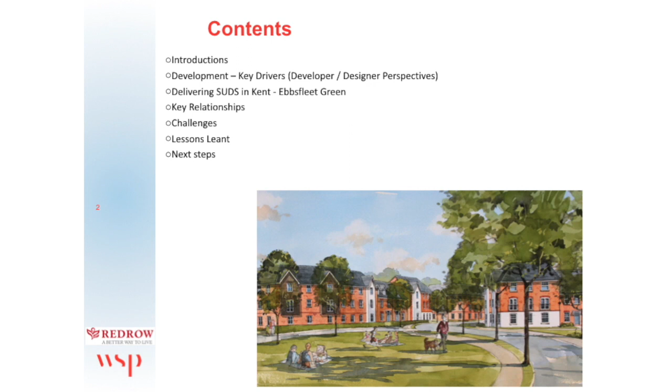We'll talk about some development key drivers, things that developers would try to look for in a development from a developer's perspective. I would also touch on some of the things I would look for from a designer's perspective. We'll talk about general delivery of SuDS in Kent with particular emphasis on the Ebbsfleet Green development. We'll touch on key relationships and challenges faced in delivering these SuDS and some of the lessons learned in delivering Ebbsfleet Green in particular, and how we can take that into the next steps into other developments. So without further ado, I'll just ask Glenn to introduce himself.

Hi, I'm Glenn Holliday. I'm currently engineering manager for Redrow Homes. I previously worked for highway adoption authorities at Kent, and I've also been a designer. My name is Dan Samaila. As a bit of a background, I have a civil engineering background as well, a chartered engineer. Bit of project management and highway design experience. Done a lot of work with trying to promote sustainable drainage, following the footsteps of some of my peers, some of them in the room as well. Trying to just do the best you can do from a designer's perspective.

One of the things I did get involved with, CIRIA especially, was being a project steering group member of the structural design and geotechnical design of modular geocellular drainage tank systems. So yes, trying to do as best as I can to improve ourselves, be able to put into developments as we go into design stages.

So, from a development point of view, obviously I'm a developer, boo, but we're here to build developments and sell houses. But there's a bigger purpose we understand that goes in and around our developments. So, a few of the key drivers that we have from a developer's point of view are: we want to build high quality homes, create places where people really want to live, build sustainable, vibrant communities, and more recently at Redrow, net gain on biodiversity. That's something that our group is driving, and it's a work in progress, but will be coming out over our developments. Obviously, when we talk about SuDS, there's an underlying, sometimes more important issue, the water management, which is where Dan comes in.

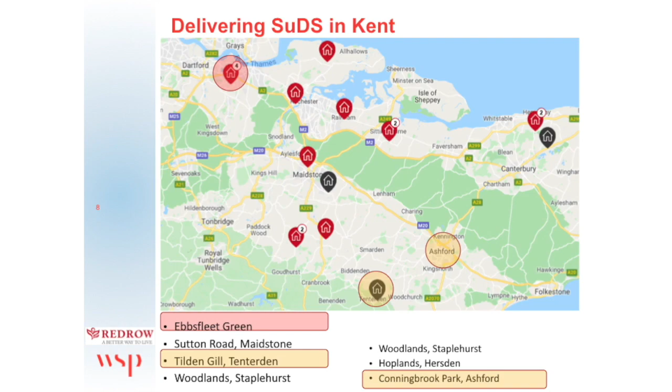Yes, and again, just to re-emphasize that each scheme needs to reflect the setting in which it's set. So, yes, we have developments all across Kent, Redrow promoting a lot of them, but a lot of them actually reflect the local setting in which they're set. So, for instance, Ebbsfleet Green, we'll touch on its constraints later on, but that kind of influences what we actually put forward in terms of SuDS.

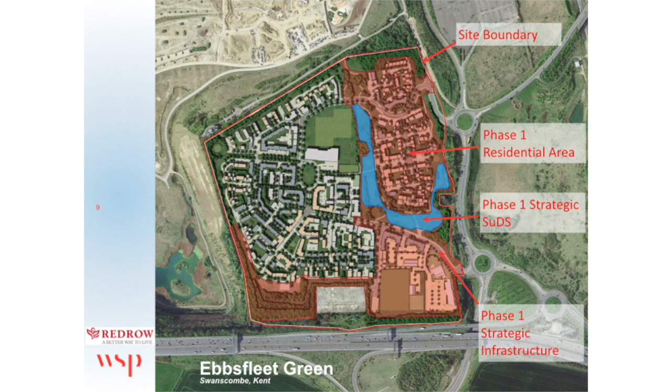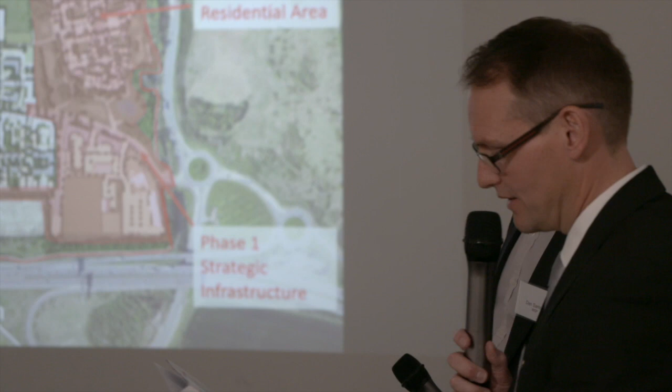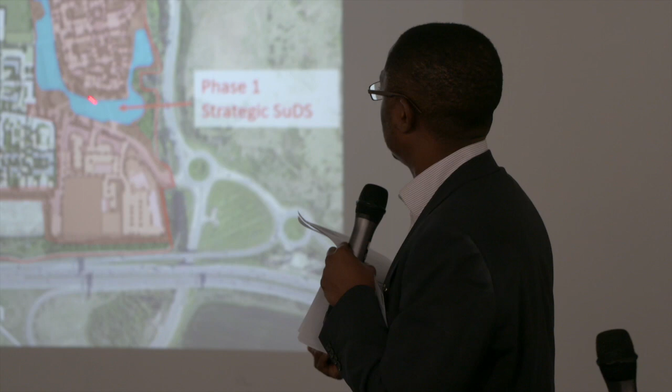Okay, Ebbsfleet Green. It's a 38-hectare site. It's a former National Grid substation, as Bronwyn alluded to earlier. The existing pylons through the site were to remain. We got outline planning permission in March 2014, and that was with Dartford Borough Council before EDC came on board. Phase 1 strategic reserved matters was given in December 2015. That was for Phase 1 infrastructure, earthworks and the spine roads. And then we got Phase 1 residential in 2016. Subsequently from there, we've had Phase 2 and Phase 3. Just to mention, most of the strategic SuDS required to service the whole development actually sits within that corridor highlighted in blue. So that kind of moves on to the next slide in terms of the constraints.

Apologies, I can see it very well on my screen here, but unfortunately the contours don't actually come out on the display there. But it's a very steeply sloping site. You've got over a 30-meter level difference between one side of the site and the other. Other constraints were trying to get the proposed flood flow paths mimicking what the existing would do. Again, apologies you can't see the contours, but those are the kind of flood flow routes that water would naturally follow to get to a low point on the site at that corner. Existing constraints also were the electric pylons that traverse through the site in that direction, more or less causing a corridor that you can't really put any houses in.

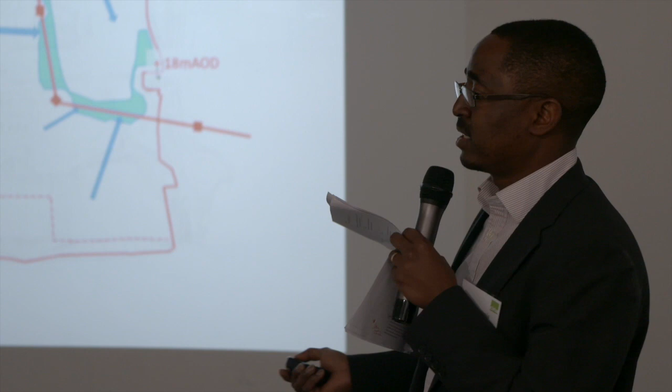We've also got issues of noise from the A2, which sits across the site that way, and to mitigate against the noise issues, we had a big noise bund with an acoustic fence across that side of the site. So all those informed the development of the SuDS scheme, utilizing as much as possible that corridor that was more or less sterilized by the pylons, but then linking all those into a corner where we can then discharge into the existing outfall of the site, which Bronwyn mentioned is a culvert literally underneath the Southfleet Road. And we have the drainage restrictions to cater for. So a big site, but utilizing the constraints of the site. Again, we mentioned about keeping things local, keeping things specific to the site setting in which it's sat.

That then informed how we actually developed the development strategy. Now, I've got a colleague in the site. We mentioned we had pre-app discussions with the client. So my colleague, Chris Palmer, some of you may know, was keen to get those discussions going to be able to inform how the site develops.

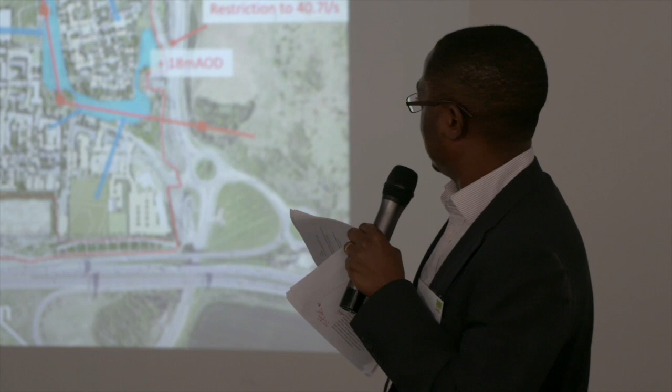And then progressively developed what the site actually did in terms of development parcels that more or less mimicked the existing flow paths and drainage regime to link into that central corridor to get to our outfall. So I won't bother you too much with technical details. A lot of you know the principles of SuDS and how SuDS fit in to try and shape a development.

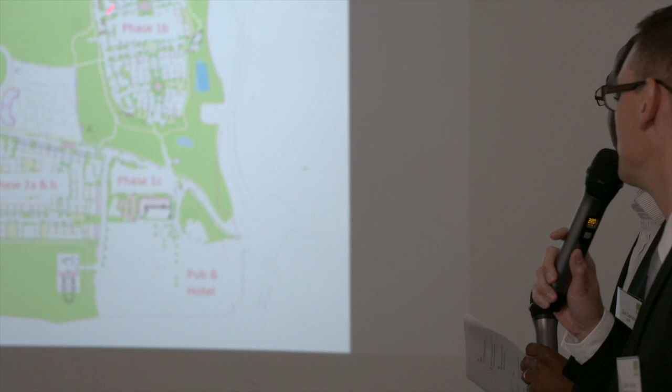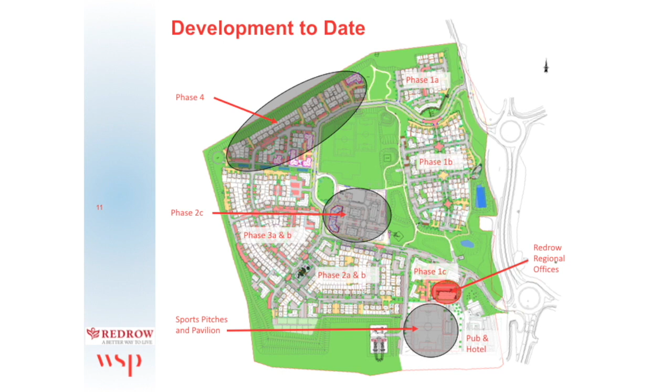Okay, where we are now. We've currently built out phase 1A and phase 1B. Also built out phase 1C, and the pub and hotel are up and running, have been for about a year. Phase 2 is probably 80% built, and phase 3 probably 50% in the ground now. Coming forward, we've got phase 2C and phase 4 in the northern boundary. And we've got sports pitches and a pavilion. We liked this site so much that we decided to put our regional office there as well.

Yeah, just to mention that decision for Redrow to actually locate was midway through the planning process, because that was always going to be a residential area. I know Bronwyn mentioned about when things change, being flexible enough to have those discussions and how impermeable areas change from the original strategy. Some other things that did actually change were, oops, should I go back?

There was going to be a hotel there, but the pub was actually meant to be in that space. But during the course of the development, in building out phase 1 and 1B, and to accommodate Redrow's desire to put their offices in, we've had to more or less rejig the drainage strategy to accommodate these changes. So it's always good to have those early discussions on how we implement changes from the start of the development into delivery.

Okay, relationships. From the outset, it's very, very important for me to get the right team on board, be it from the original architect to the engineer. I'm happy to say that this engineer did all right because he's still standing next to me. So it's very important to get that buy-in at a very early stage, because that helps me understand it as well. As a developer, obviously, we're looking at the site as a whole, need to get numbers, but we need the team around us to help us see the bigger picture.

Early engagement with the lead local flood authority. This, for us at Redrow, is a major part of what we do. As Bronwyn said earlier, open door policy. We get in at due diligence stage. We speak to Bronwyn and her team, and we try to understand the constraints and what we can do going forward. Then there's the local planning authority. In Ebbsfleet, obviously, we've got the EDC. We're working well with them. Obviously, we're part of their vision for their garden city, so we do try and work closely with them.

Yeah, just touch briefly on processes as well. Pre-apps, again, very important. I think everyone's known the importance of that. But I can't stress how important it is to do that regularly. A scheme like Ebbsfleet takes a number of years over a number of phases. So for each phase, we do try and get that early discussion about how to deliver that particular phase. A lot of times we do have overlaps between early stage of one phase while you're actually delivering and trying to verify what you've actually built on all the phases.

So we do have joint meetings to talk about different phases in the same meeting, which can get confusing sometimes because you turn up to a meeting probably not with the right set of sheets and documents. What we've done in this phase over the years is actually had a lot of discussions, as I mentioned, pre-apps, and also looking at what we've actually built.

So the delivery team, again, it's important to get the right contractor, and when we issue the pack, it's important to sit down at pre-start and actually get through to the contractor what we're looking for. How many times have I sat there with a piece of paper that looks great, and then at the end of the job I walk out there and I see something that is lower than my expectations when it's finally

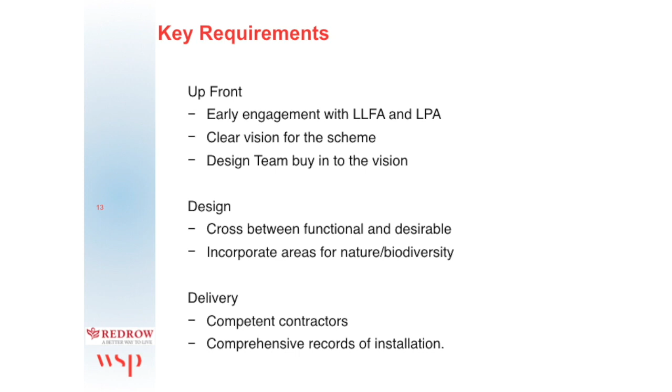Key requirements. Okay, so this is a personal thing for me, what I look for at Redrow. So the early engagement, that's vital. A clear vision for the scheme, and then a design team buy-in to that vision so that we're all going in one direction. There's always that crossover between the functional and the desirable. And then we try and incorporate nature and biodiversity. When it comes to delivery, I mentioned before, competent contractors, and then comprehensive records of installation, which helps us going forward in getting our sign-off for the verification.

Yes, just a quick highlight on the crossover between functionality and desirability. So we'll do a little, small exercise later on just to test that concept. So the journey so far. Early days, we mentioned it's a very steeply sloping site. Major level differences across the site.

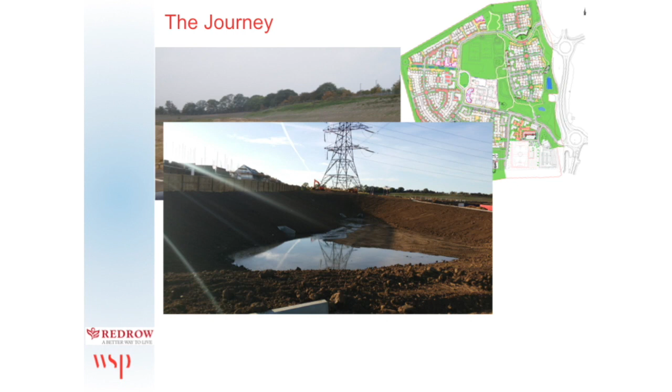So just to create your development platforms to start off with, a lot of bulk earthworks took place. We had a lot of soil nailing along the northern boundaries of the site. We had the noise bund to build, and we had loads of cut and fill within the site to then develop the SuDS areas. A lot of earthworks went in to establish the SuDS features and also shape them. So this is a view across this corridor where the primary SuDS features were kept. So when you look at the journey, going from this, creating the features, to then actually get a scheme that looks good.

So we're quite pleased with how it turned out. What was almost a dead space underneath some pylons, we feel we've created a corridor which actually looks quite attractive for the people who live on our developments. Yeah. So in terms of delivering a SuDS scheme, we look at things that are aesthetically pleasing. Is it an area that people can actually utilize? So you can see we've got footpaths that run right through it. We've got features, sitting benches, people can sit down, planters. We've got play provision as well, trim trail across the site.

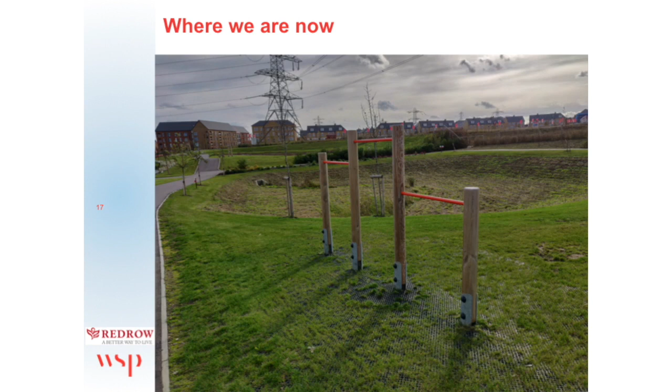And there's a picture of one of the basins. And we've also got a wet pond along the SuDS train. But all these features are there to enhance them and make them usable so that people can actually enjoy them, make use of them.

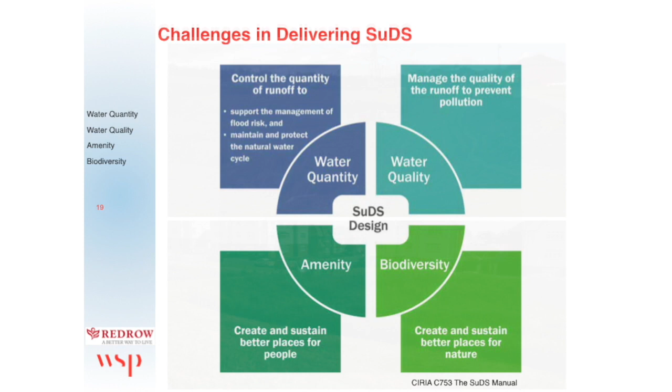So perspectives are really key in terms of challenges. How do we show that a SuDS scheme delivers its multiple benefits? Because there's always a subjective nature to what makes something acceptable. Again, planning policy: we talk about that subjective nature of it. Can you actually put that into policy? Can that actually determine what you actually build? So that's the challenges we face on the Ebbsfleet Green.

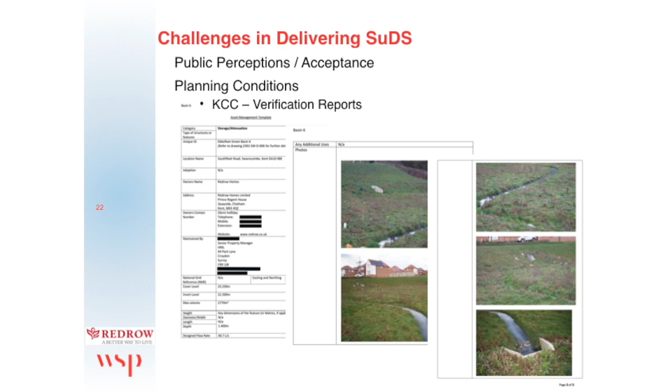The Emerging Kent policy talked about verification reports. So yes, we've done an initial trial of this, with all the schemes we've done, to put the forms together and make the submissions to see whether we can get those approved. I think we've done a pilot on them, but we're still doing that process, trying to refine what we actually do to get those features accepted and certified, as it were, that they meet their objectives.

Lessons learned? Okay, well, I think what went well is understanding the SuDS approval process. I think we've achieved that, but we're still learning and moving forward. The early engagement with the lead local flood authority, and we also like the user-friendly guidance from the lead local flood authority in Kent. And then what could we improve going forward? We talked about design guides. Kent have a lot of design guides and policy statements.

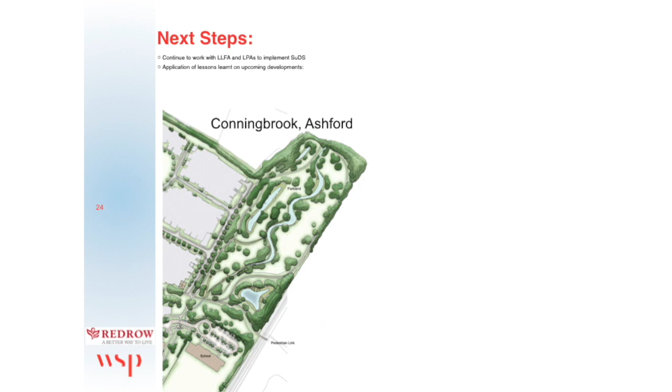We've also got Tilden Gill in Tenterden, where again we're recognizing the local constraints of a particular site. That site initially had a big basin right in the middle of the site. So it was not a desire to have such a feature that big; it was already existing. But in order to develop the design, we had to sit down with Bronwyn, and she gave us some advice about establishing some of the restrictions to the discharge from off-site into our site. And we took that on board and it actually saved us a bit of storage. So thank you for listening to us, and thank you.

Thank you. Thank you very much. I don't think I've ever seen so many people in a pub without a drink.

Anyway, any questions from the floor? Got a few minutes before we move on.